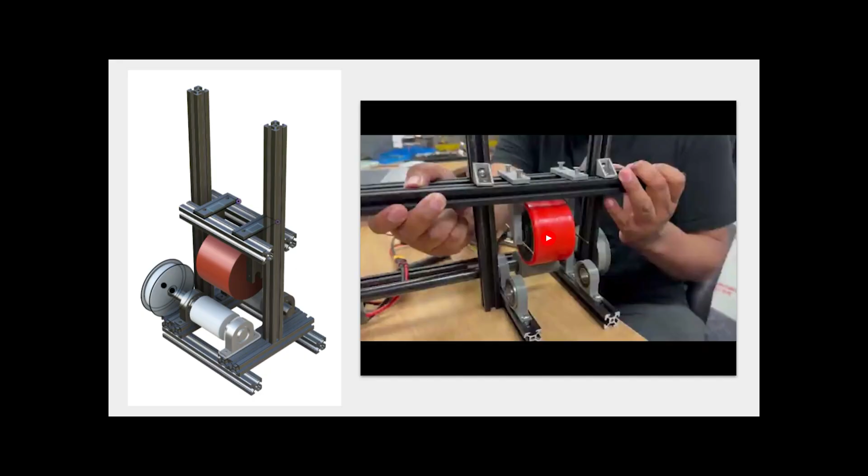This is a tolerancing project we do for ME110 manufacturing processes at San Jose State University. Our members include Kiara, MZ, Justine, and Anthony. Here is the product that we chose for the tolerancing project.

The project comes from Kiara's senior project. They are currently developing a dynamometer for electric motors that will be used in Spartan Superway vehicles. To assess the hub motors, we place them between two rollers. These rollers utilize the bearing and bearing housing that will be demonstrated for this project.

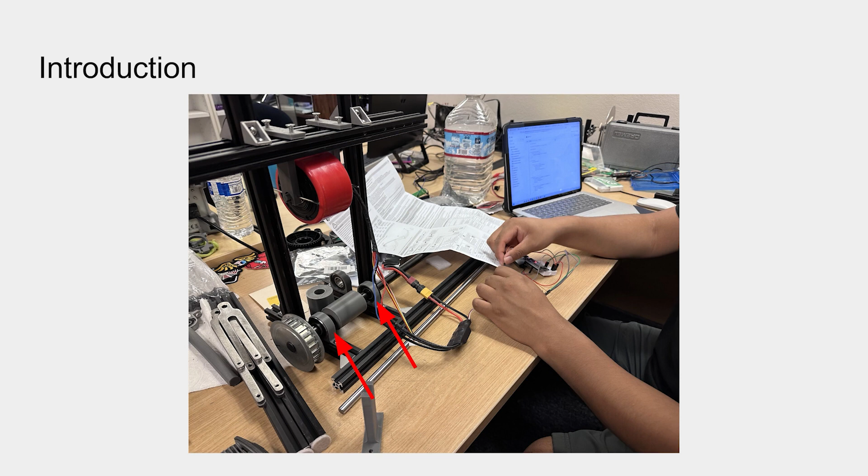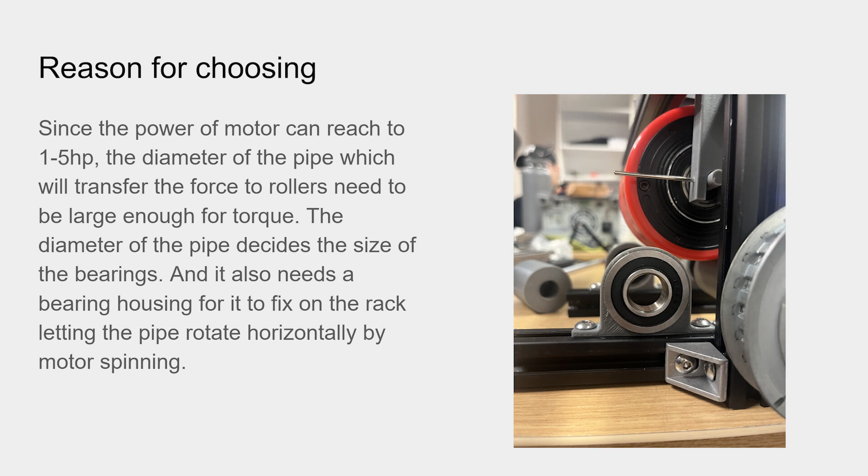Here are the reasons for choosing this part. Since the power of the motor can reach 1 to 5 horsepower, the diameter of the pipe needs to be large enough for transferring the force to the rollers. It also decides the size of the bearing, and the bearing needs a bearing housing to fix on the rack, so the pipe can rotate horizontally when the motor is running.

The ball bearing consists of two components: the actual metal balls and the rings, or races. For our purposes, we are only interested in the races, since this is the part that will mate with the bearing mount. The races go through a variety of different processes during their creation.

The first step is to lathe steel into a shape similar to the basic shape of the bearing, but slightly bigger, since heat treatment will be necessary to harden and toughen the steel, and the heat treatment will cause the material to warp. The final step is grinding the races down to the desired size and finish.

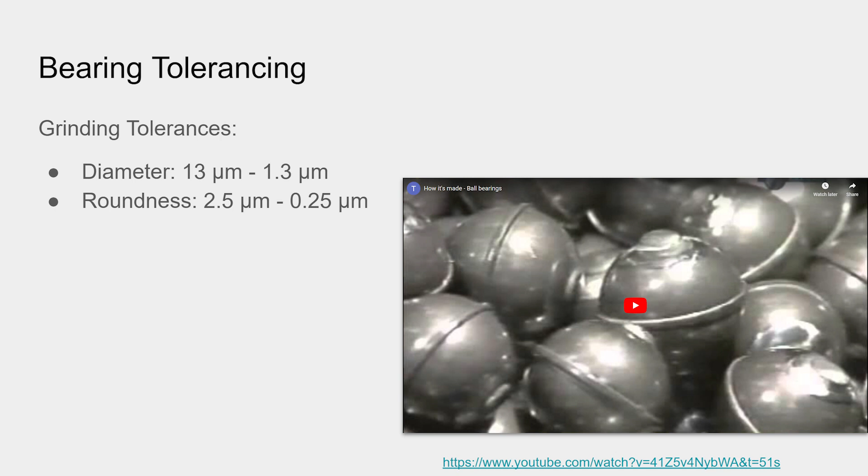Since this includes the finish of the bearing, this is the step that we are most interested in for deciding the GD&T tolerancing. The typical tolerances for grinding are 13 micrometers to 1.3 micrometers for the diameter, and 2.5 micrometers to 0.25 micrometers for the roundness. The video in the bottom corner is an example of this grinding process.

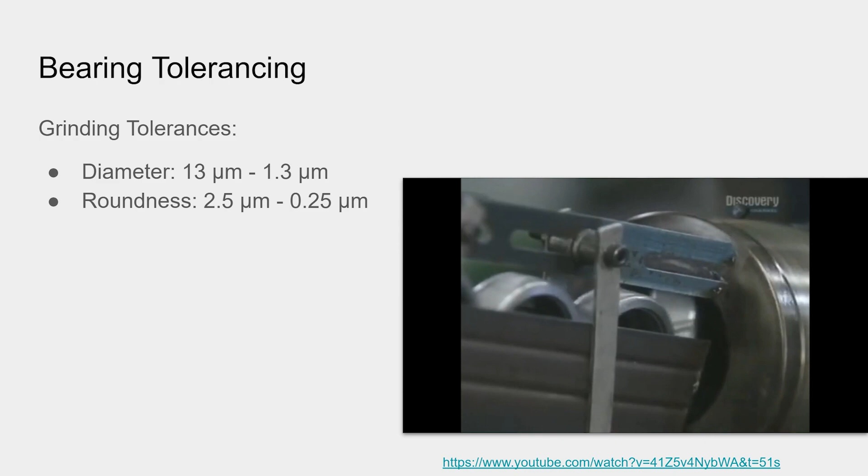The purpose of the ball bearing is to reduce rotational friction and support radial and axial loads. It achieves this by using at least two races that contain the balls and transmit the load through the balls.

For the ball bearing, we chose a tolerance of 0.01 millimeters for the outer diameter of the race, which is well within the capabilities of the grinding process. The ball bearing has a specified diameter of 34.93 millimeters, which was press-fitted into the bearing clamp and also snugly fit a 5/8 inch rod.

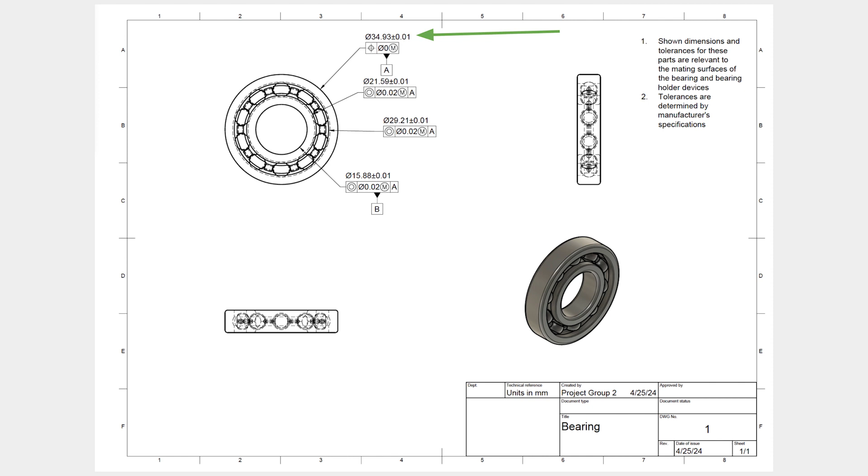For the bearing mount, we chose a tolerance of 0.1 millimeters. This is because the part was manufactured using 3D printing. The typical tolerance seen for 3D prints is 0.127 millimeters for tight fits, so this is within the capabilities of the manufacturing process.

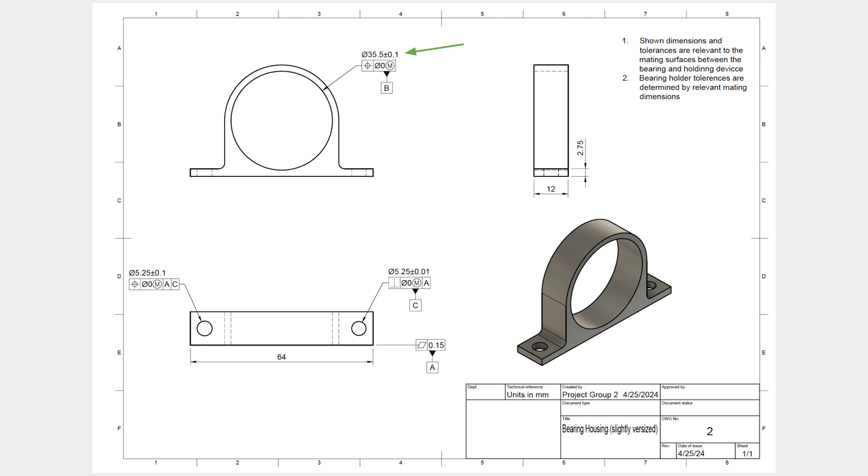The mount is given the same position as the bearing to ensure the two components can be mated. Due to the fact that this part is 3D printed, we don't have to worry about any shrinkage unless we print with nylon 12 or other materials that lead to shrinkage.

GD&T stands for geometric dimensioning and tolerancing, and it is important in communicating the intent of the design rather than the actual geometry of the part. In other words, the purpose of using GD&T is to ensure the part is functional and reduces costs for manufacturers by allowing less important design features to have larger tolerances.

Using GD&T establishes distinct categories of imperfections, which include size, form, orientation, and location, and also standardizes a means in which to communicate design intent in terms of these imperfections. Thus, GD&T is a better alternative to conventional tolerancing because it allows manufacturers to meet the functional requirements of a part without unnecessarily tight conditions.